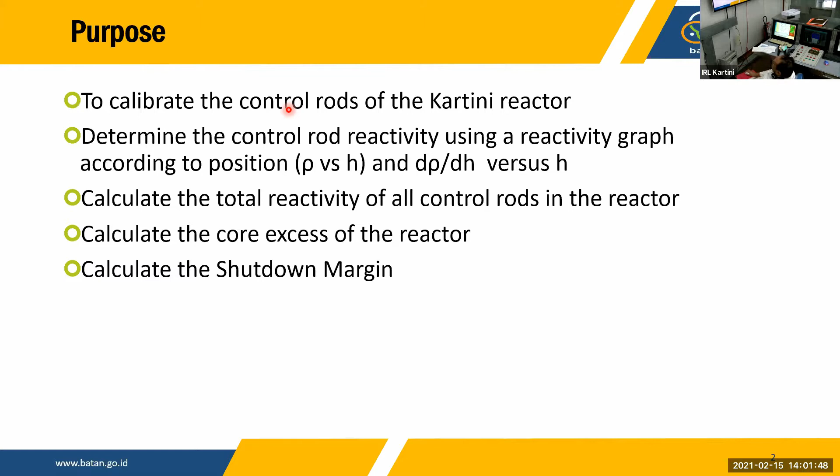So besides doing the calibration of the control rod in the Kartini reactor, hopefully we are able to determine the control rod reactivity using a reactivity graph according to its position, and the changes in reactivity versus its height. But mainly we will focus on the changes between its reactivity and its height only. So if we have time, we will discuss this, but if not, we will mainly focus on this.

And next, we will try to calculate the total reactivity of all the control rods in the reactor. And then we will try to calculate the core excess of the reactor. And finally, we will calculate the shutdown margin of the reactor.

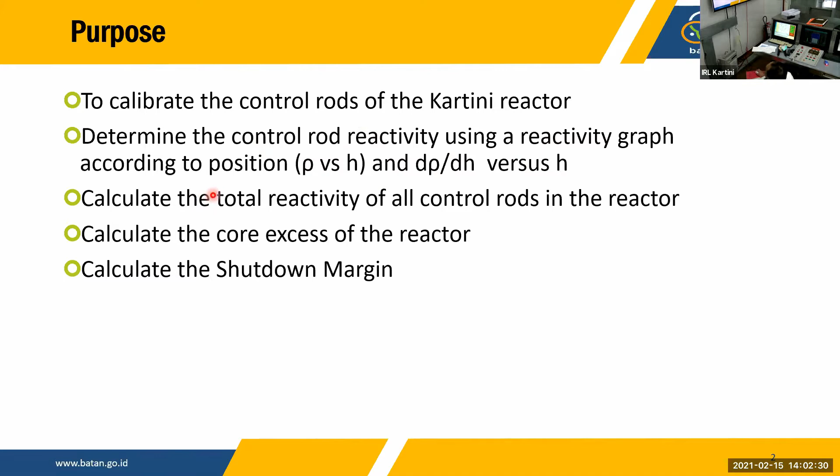So just so that we are all on the same level, a control rod is a mechanism that is used to absorb neutrons and try to control the power of the reactor. To control this, they absorb the excess neutrons, and then they change the amount of neutrons that is available inside of the core.

The control rod itself can be made out of several elements. Like the one that we have here in the Kartini reactor, we use boron carbide, so B4C. But other reactors have different types of material used for the control rod. For example, the one in Serpong, the MTR owned by Indonesia, uses AgInCd. So silver, indium, and cadmium, which they alloy into one material and then use as a control

rod. So the material that is chosen for a control rod depends on the power that is used. For example, if we use cadmium instead of boron carbide as the material for the control rod, it will not be as sensitive compared to when we use boron carbide.

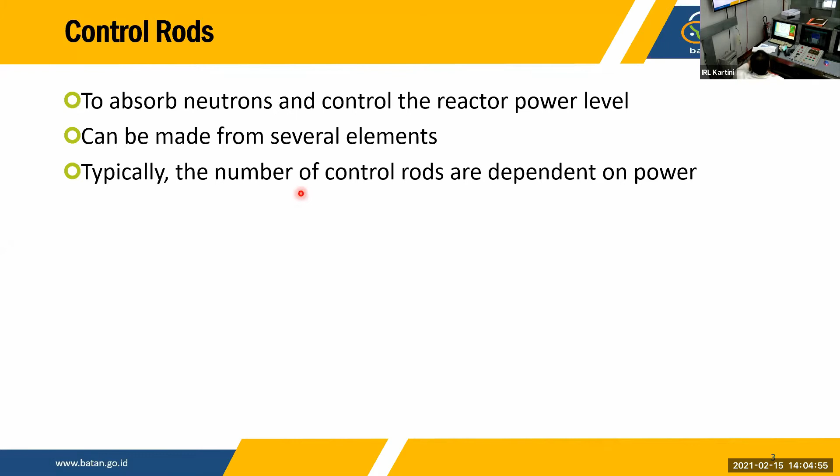So the reactivity of the control rods is dependent on several things. First of all is the type of material used. Here, we don't use stainless steel as a control rod, but it is used as the cladding for the control rod itself. But the materials that we can use are either boron or silver.

Okay, besides the types of material used, there are other things that influence the reactivity of a control rod. The second thing is the physical dimensions of the control rod itself. So, for example, if we have a different geometric size of the control rods or a different density of the material that we use, we will have a different reactivity profile of the control rod.

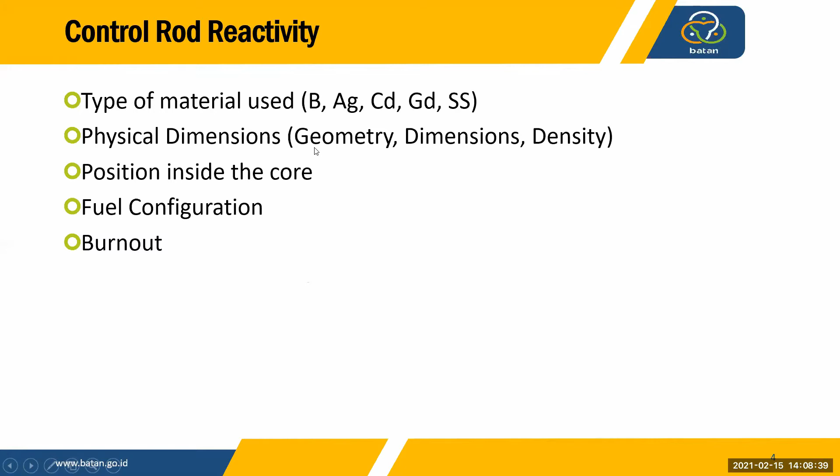So here, for example, the control rods that we use in the Kartini reactor are all made from boron carbide. And if you remember from earlier today, the positions of the safety rod and the compensation rod are both at the C ring. So they have the same distance from the center of the reactor core.

But due to them having different densities, where one is made from solid boron carbide while the other is made from boron carbide powder, they have different properties in reactivity. And the other thing is the position of the control rod inside the core. So the third control rod in the Kartini reactor, which is the regulating rod, is situated in ring E, which is a lot further from the center of the core compared to the compensation

and the safety rod. And then the fuel configuration, which depends on the amount of fuel, where the amount of fuel will change the amount of uranium-235 available inside the core, and the amount of uranium-235 will influence the core excess and the shutdown, and in turn the shutdown margin of the reactor. And finally, there is the burnout of the absorbing material within the control rod.

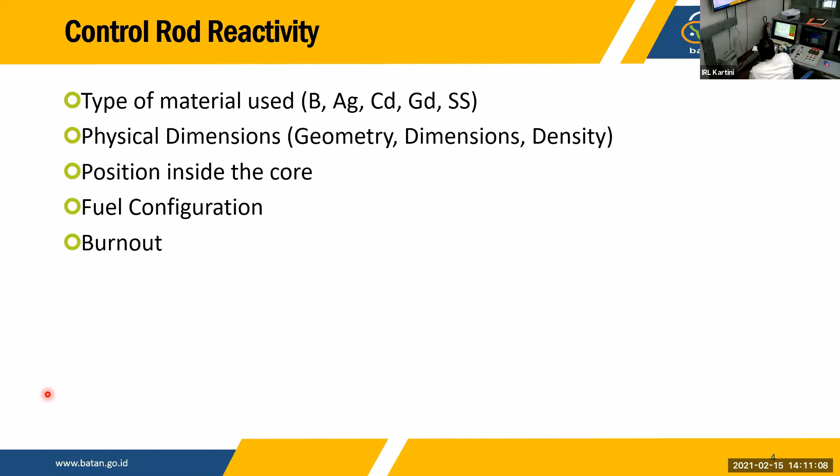And they are all made from boron carbide, with boron having a cross section of 3,837 barn. When boron-10 interacts with a neutron, it absorbs the neutron and becomes boron-11, which in turn transmutates over time into lithium-7 and helium-4, emitting an alpha with an energy of 2.73 mega electron volts. Boron-11 has a comparatively long decay time, so sometimes it is also considered in the calculation of the reactivity of the control rod.

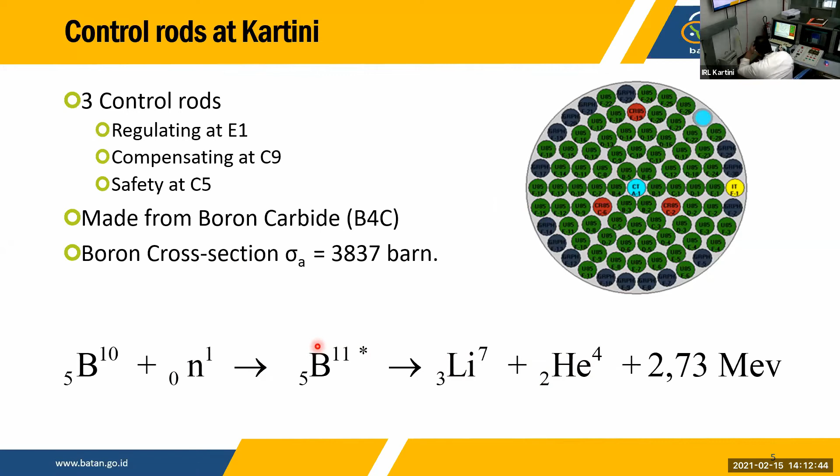We use electromagnets, where the electromagnet is pulled using a rack and pinion system, and this rack and pinion system will raise and lower the control rod according to the demands of the operator. If there is a scram, the current to the electromagnet is automatically disconnected, it loses its ability to hold the control rod, and the control rod will automatically fall to its zero position.

So that there is no damage to the control rod materials, there is a stopper here, so that the control rod will not fall past its zero position to, say, minus 10%, because the stopper holds the maximum limit of where the control rod will fall.

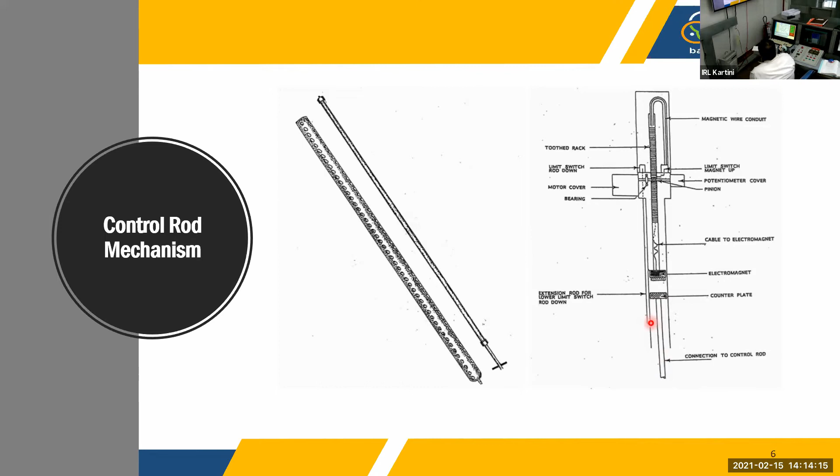This is a thing that we must consider when we are doing this practicum, where we need to take care of the reactor period. As I said before in the previous experiment, the period is the time needed to increase the power up by e times, where e is 2.7182. The smaller it is, the more rapid the power increase. So here at the Kartini reactor, we try to limit the period up to 7.

So later today, when we do this experiment, there are a few things that you have to take note of. The first thing is the control rod position, and then the reactivity, which is shown in our monitor, but also see the period, where seeing the period tells us when the control rod has stopped being raised.

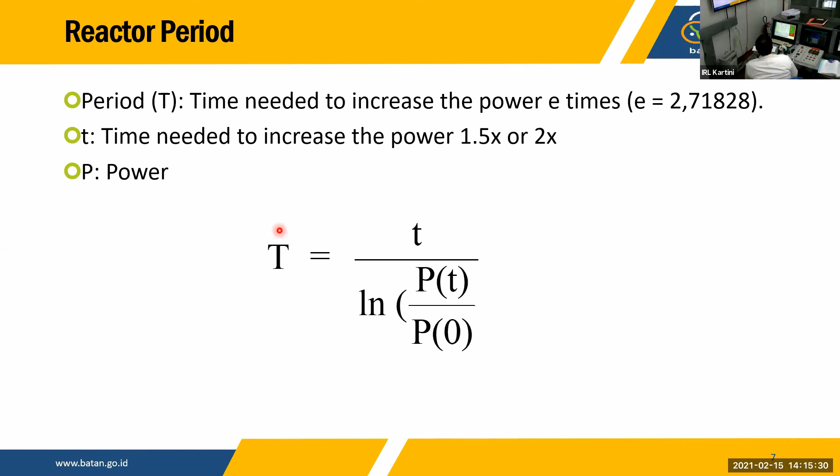So this is a graph on how we change the power. First of all, when we operate the reactor at a certain power level, it is constant. And then when we raise the control rod, it will not increase linearly, but there is a slow rise in the reactor power. After we increase it further, there will be an almost linear increase. And when we stop, it will not automatically stop, but it will stop very, very slowly until we reach the desired position. So it is almost like an asymptote at the end.

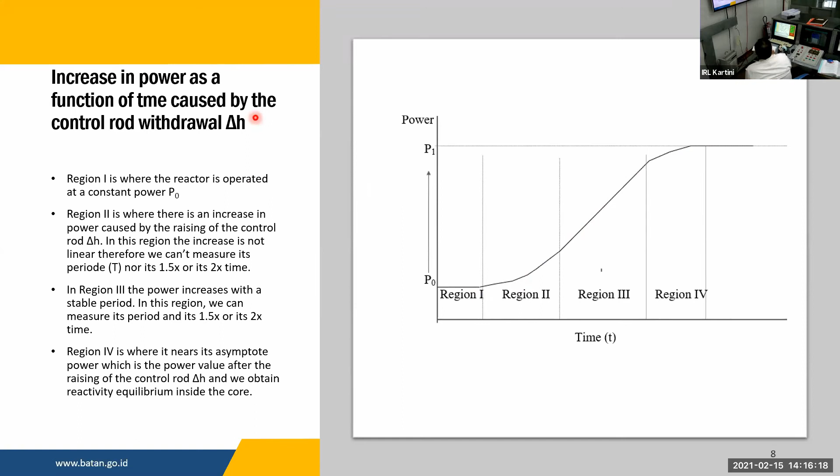So next, we will talk about the core excess. This is a schematic of the reactor inside. We have 3 control rods, and this is the reactor core, where we have a detector. Here we use a CIC detector, the compensated ionization chamber detector, which gives an output in the form of a current. The current will be gained by the amplifier and preamplifier, and then connected to either the reactivity computer or the ampere meter.

So here we will see the changes in the current by looking at the reactivity computer or the ampere meter. Using the ampere meter, we will see the changes in power, 1.5 times or 2 times, depending on how we calculate. Or using the reactivity computer, it will calculate and convert the signal into K. We know that the reactivity is (K minus 1) per K. So it will automatically output this in either dollars or cents. So this is how the detection system works.

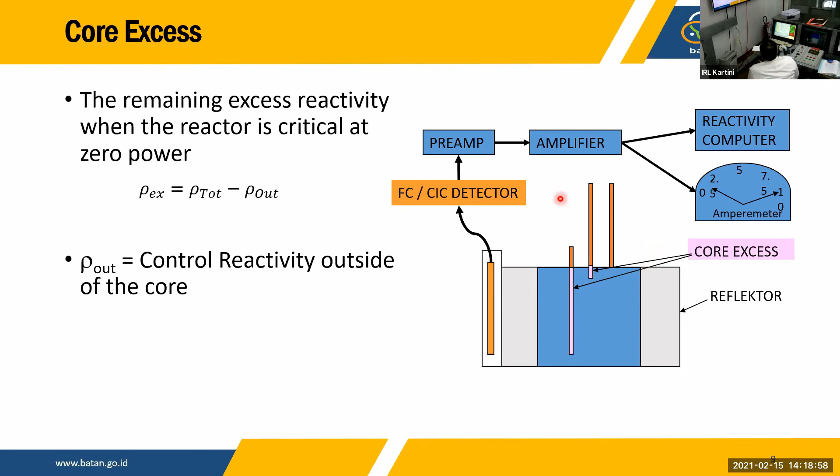And here, the core excess is the part that is inside of the reactor core. So core excess is the total reactivity reduced by the reactivity of the control rods that are outside of the core.

Another thing that we have to calculate here is the shutdown margin, which is the capability of the control rods to shut down the reactor, assuming that the control rod with the greatest reactivity is unavailable, or in this case, stuck. So if we trigger a scram and the control rod with the largest reactivity is unable to drop, this is considered the shutdown margin. The shutdown margin can be calculated as the total reactivity reduced by the reactivity of the stuck rod and reduced by the core excess.

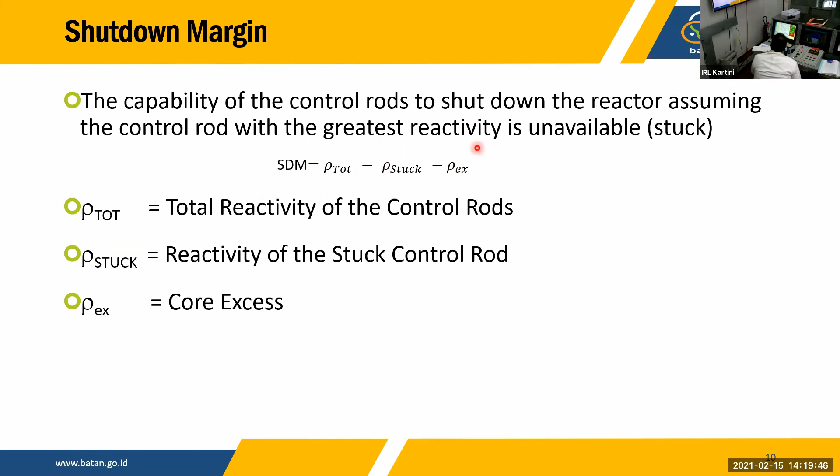Okay, so here we would like to talk about the experiment regarding the equipment that we use for today. So today we can use either the Keithley picoammeter or the reactivity computer, but we have already set up our equipment to be using the reactivity computer because it will be a lot easier and it will not be influenced by the delay of the signal from sending the data from here at the control room to Malaysia.

Because if we use the picoammeter from Keithley, we have to be very sensitive because we are trying to take note of the time that it takes to increase the power 1.5 times. So for example, the current is 0.2, and then we have to take note of the time needed for the current to change from 0.2 to 0.3, and then from 0.3 to 0.45, and then from 0.5 to 0.75, and so on. So using the picoammeter is better done when you are in person here at the Kartini reactor, because it is very prone to error when we use teleconferencing. Therefore, we will be using the reactivity computer.

And to do this with the picoammeter, we would be using a stopwatch, but we will not be using this today. And then also a reactivity graph, which is the graph of reactivity of the control rod, based on the manufacturer of the control rods, versus its time and its reactivity. And this is also unnecessary for this experiment. So basically, the things that we will be using today are only the reactivity computer, and then a form that you will fill, and then you can calculate using that form the reactivity of the control rod.